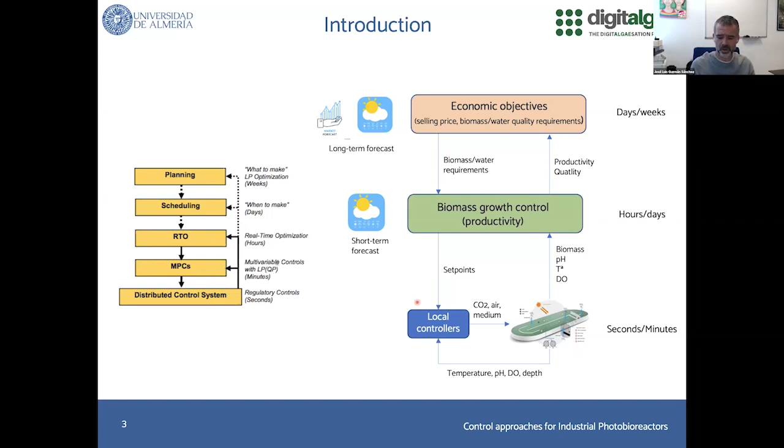Imagine that we have a Formula One car, so we can have a very nice engine and very nice aerodynamics, but if we don't take care of the tires of the car, the performance of the car is not going to be very good. From our point of view, it's the same when we are working with the reactors.

We can propose very nice, very relevant objectives from a high-level point of view, but at the end, if we don't take care of the most important variables, which are directly connected with the microalgae growth rate, we will not reach the final goal that we pursue with the global control architecture.

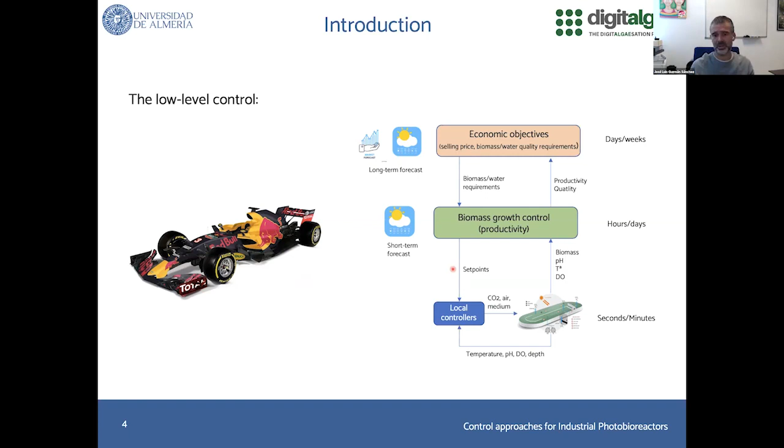For that reason, I will focus mainly on the control of temperature, pH, and dissolved oxygen variables. If we take a look at the microalgae growth rate model, we can see that those variables, as we saw in previous talks, directly affect the microalgae growth rate and then the productivity, such that if we are able to keep these variables close to the optimum values, we will improve the final productivity of the process.

It's not only important when we work with microalgae in clean water. When we work in wastewater treatment, it's interesting to see how these variables also affect the bacteria growth rate. So we can define different kinds of objectives, just trying to optimize the values of temperature, pH, and dissolved oxygen.

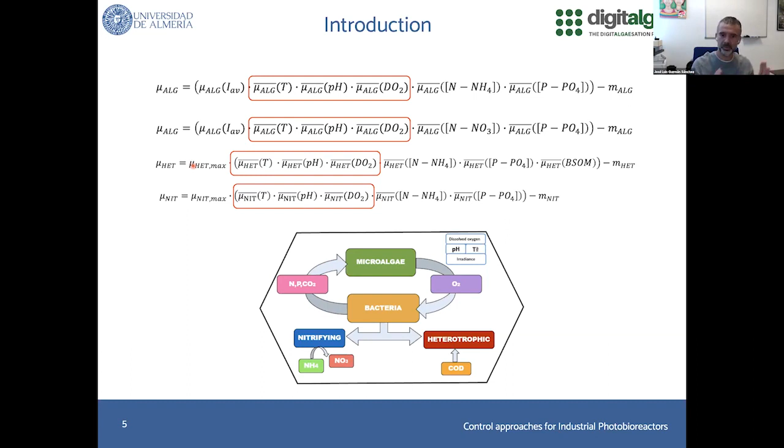All the results I will show you later have been evaluated in different types of reactors that we have here in Almeria, always in outdoor conditions.

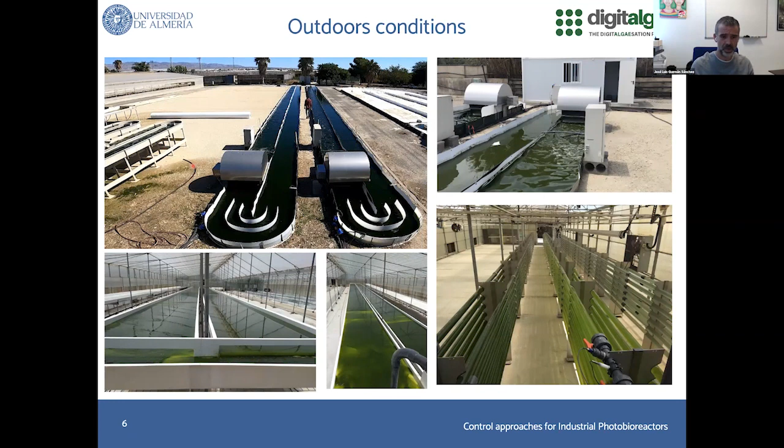Starting with the low-level control of temperature, pH, and dissolved oxygen, which are the variables I will focus on. The idea is that we would like to reach the optimal value for temperature and pH for the strain we have in the reactor at that moment, and also to avoid that the dissolved oxygen is above the critical limit for microalgae growth. Then we will develop different control approaches just to be able to keep these variables close to the optimal values.

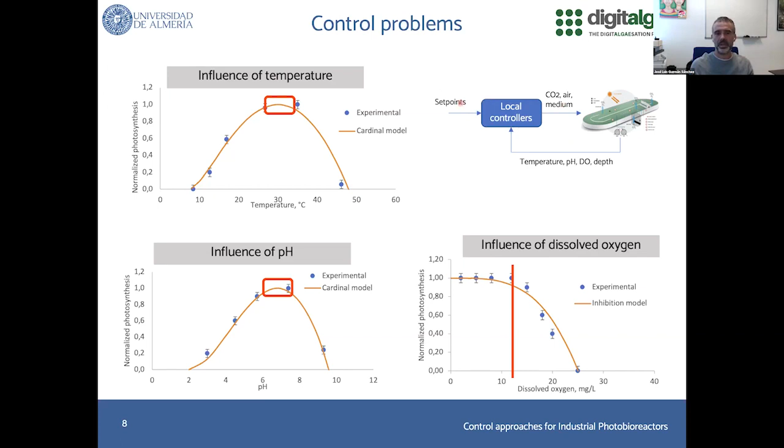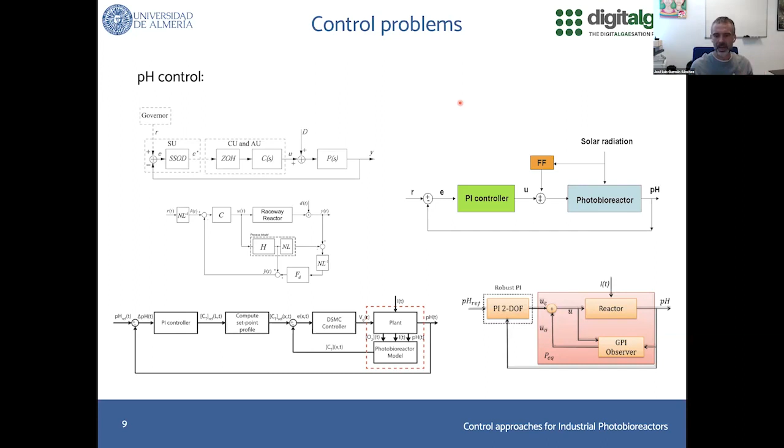So let's start with the pH control. From my point of view, it's a tricky and funny problem at the same time. We have developed many different control approaches to keep the pH around the optimal value, but here I will show you some of them.

If we take a look at the results, classical results of an on-off controller, we can see the behavior of the pH, where when we inject CO2, the pH decreases, and then when we stop injecting, because of the photosynthesis phenomena, the pH increases again.

So we are fighting all the time with the behavior of the pH, which is very interesting from a dynamics point of view, because it strongly depends also on the weather conditions, of course, because of the photosynthesis phenomena.

So we can try to control the pH from different perspectives. I will show you some of them.

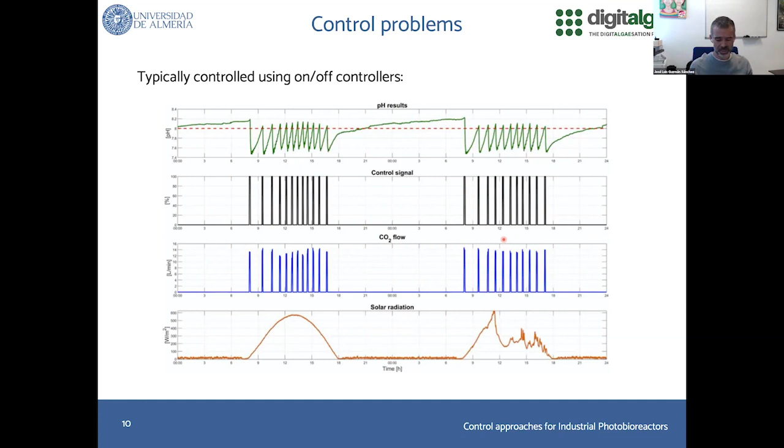One of them is considering the nonlinear dynamics of the pH and its relationship with the inorganic total carbon, such that we can control the pH value through the control of the inorganic total carbon, by trying to keep the equilibrium of the different carbon sources that we have in the medium.

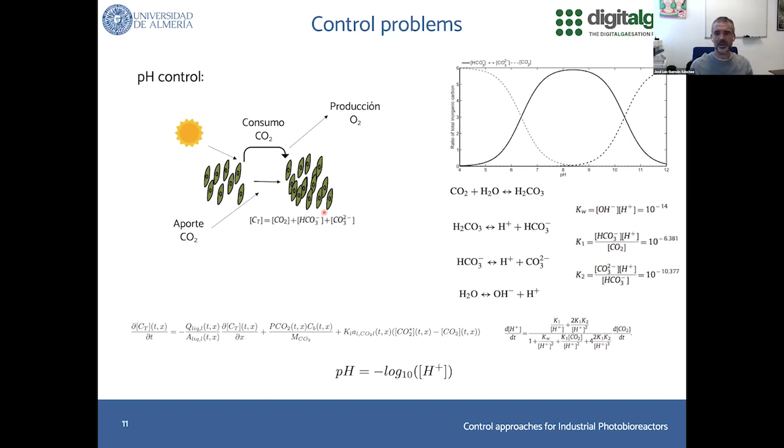Following this idea, we developed a cascade control approach such that we want to control the pH in the medium through a sliding mode controller, which tries to keep the optimal value of the inorganic total carbon that, at the end, is related with the pH value in the system.

We evaluated this approach in the real facilities, and here you can see how we were able to keep the pH value at the optimum set point all the time, thanks to keeping the inorganic total carbon around the set point that was calculated online using this control approach. The results were very good, but the point was that the consumption of CO2 was high.

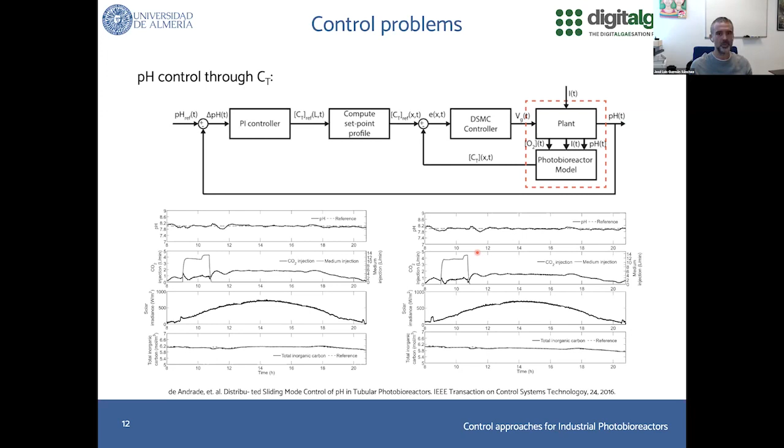So, according to this result, we were thinking about other different solutions, just looking for a trade-off between performance and running cost, how to reach that trade-off. And for that reason, we started to work with event-based control approaches.

We developed an event-based model predictive control algorithm with the following idea. We know, as we saw before, that we have an optimal value for the pH which maximizes the microalgae growth rate. However, if we move just around this value and not just think of the exact value of the pH, we can maximize the productivity, but at the same time, reduce the injections of CO2, and of course, reduce the associated cost.

So the idea is very simple. Once we are in that range around the optimal point, we will not inject CO2, we will not generate events. And when we are out, we inject CO2, and then we provide events to be able to go back to that range.

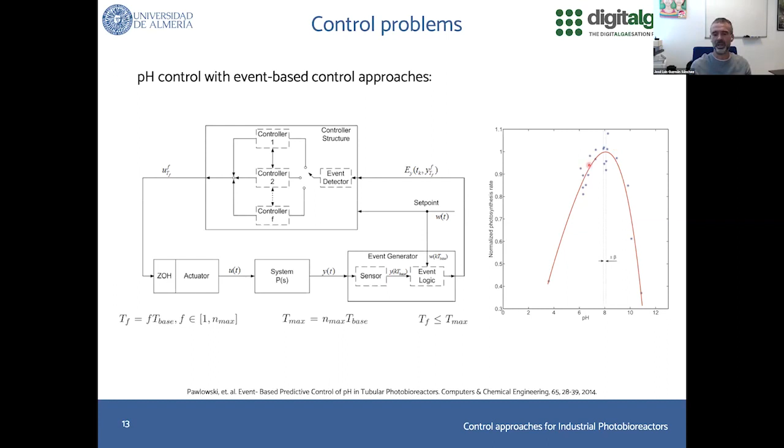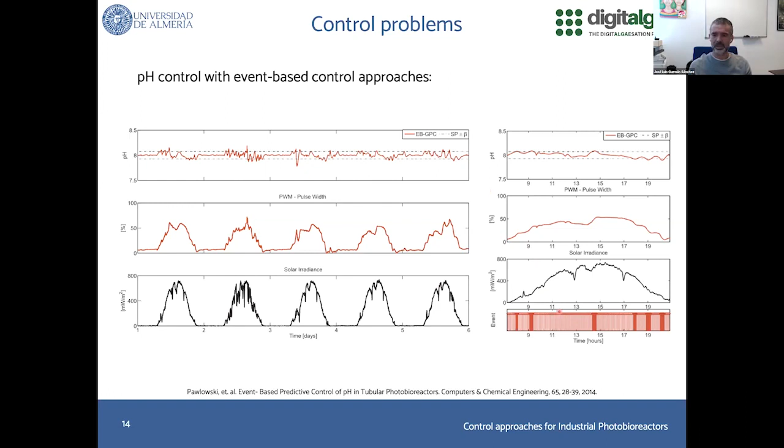So we evaluate the behavior in a raceway reactor, in a tubular reactor, in a closed reactor. Here you can see the results, where now we are not worried about the optimal value, but a range around that optimal value. Because of that, the performance, as you will see in the numerical results, was kept very close to the optimum, but we reduced considerably the injections of CO2.

Here, we made a set of 7-day experiments. Here we compare the solution of just controlling the system with a time-based approach, where we try to reach the optimal value all the time, with the event-based model predictive control approach and the classical on-off control solutions.

We can see the productivity is practically the same in the case of the time-based and the event-based control approaches, but we reduce the injection times every day. So at the end, the reduction of the CO2 injections was over 30%.

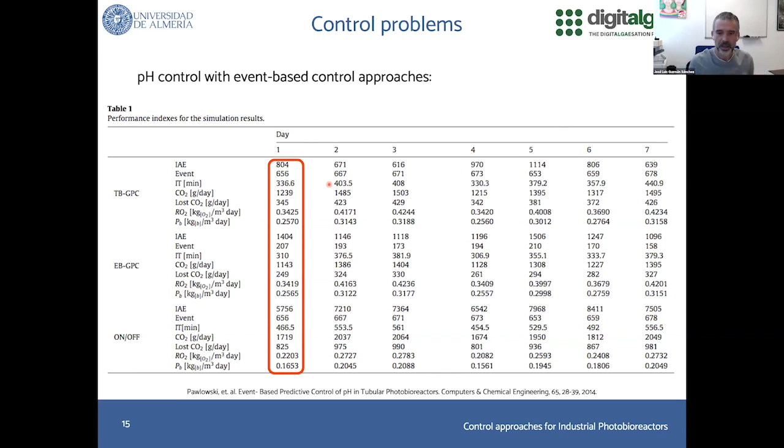So another interesting issue in the control of the pH is that when we usually control the pH, it's during the daytime, because that's when the microalgae are doing the photosynthesis process. But then at the evening, we disconnect the pH control. What happens is that during the night, the pH continues increasing, because in the evening the microalgae continue doing photosynthesis for a while.

And because of the injections of CO2 that we did just before disconnecting the control approach, the pH increases during the night, as you can see in these results and in these other pictures. Because of this, every morning we had to inject a lot of CO2 to decrease the pH value. But also it wasn't good for the microalgae performance, because the pH was changing to high values every evening and every night.

Because of that, we developed different models trying to control the pH also during the night with just a few CO2 injections, in such a way that the objective was to keep the pH value close to the optimal reference every night.

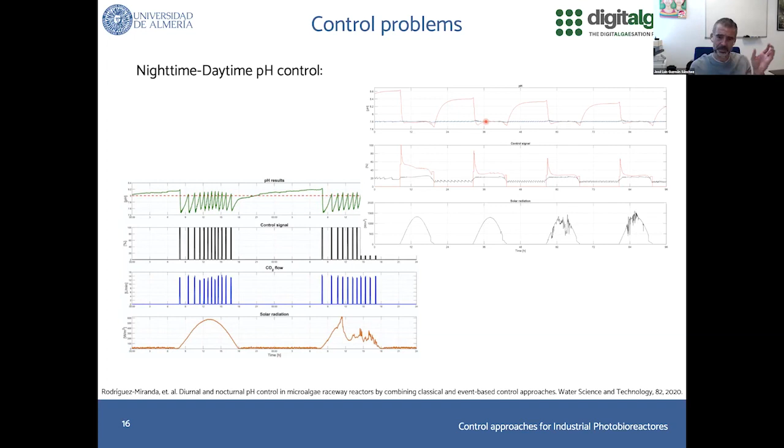So we combined this idea with the event-based control approach that I showed you before, and we obtained these results. As you can see, during the night, we applied just a few CO2 injections to keep the pH close to the optimal value. Because of this, the pH value is not reaching high values anymore, and we are close to the optimal value every morning, as you can see in these results.

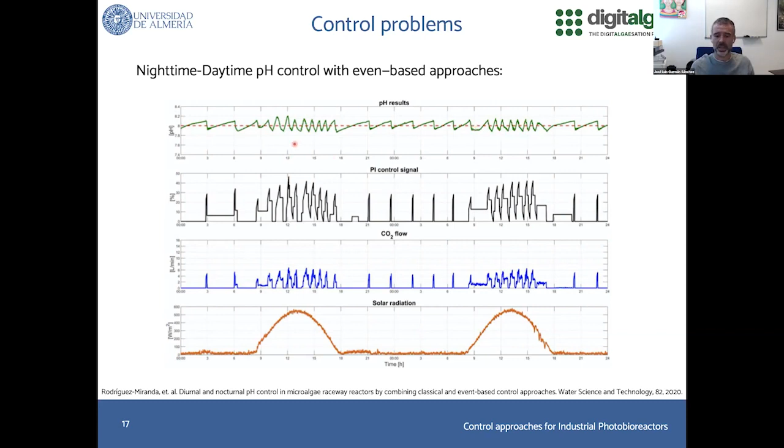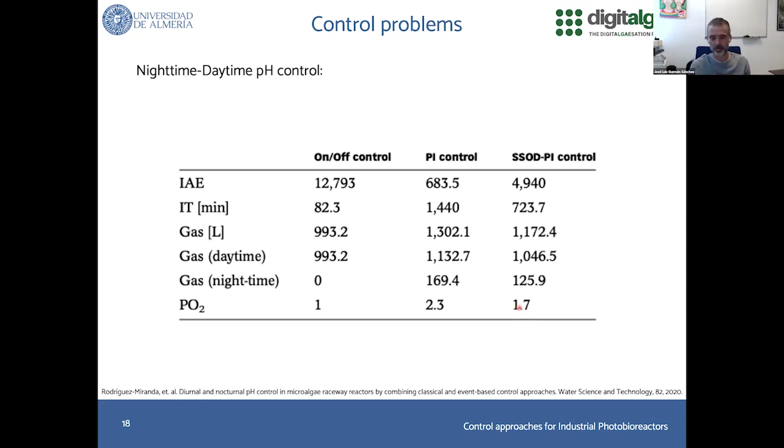So regarding the dissolved oxygen, the idea is just to avoid that the dissolved oxygen goes above the maximum limit. Classically, what is done in the reactors is just to inject a specific air flow in order to decrease the dissolved oxygen in the medium. And sometimes we are just spending so much flow. So what we tried was the following.

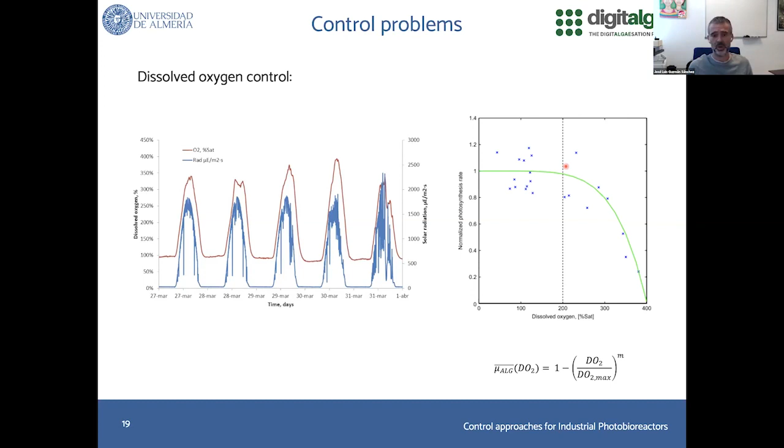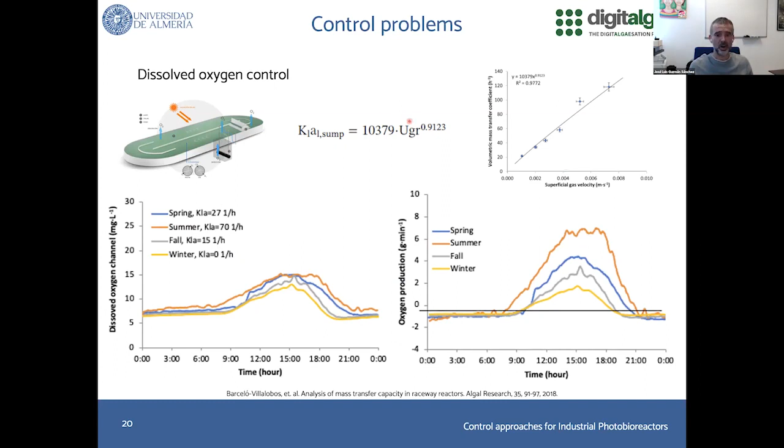We used a model that was developed in our group, which demonstrated that the mass transfer coefficient is not constant along the day, but is variable. It can be related to the air flow. So according to this model, we compare the classical control approach, which is: when the dissolved oxygen is above the limit, we inject a constant airflow to the reactor.

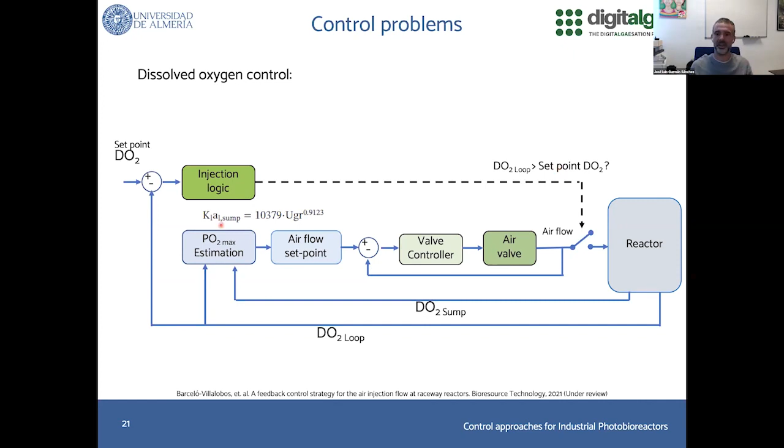Then this solution was evaluated and compared with the following one. The idea was now to estimate the mass transfer coefficient online, and then relate this value with the airflow that is needed in that moment to decrease the dissolved oxygen. So we don't have just a constant airflow anymore, but it's variable along the day according to the mass transfer coefficient changes.

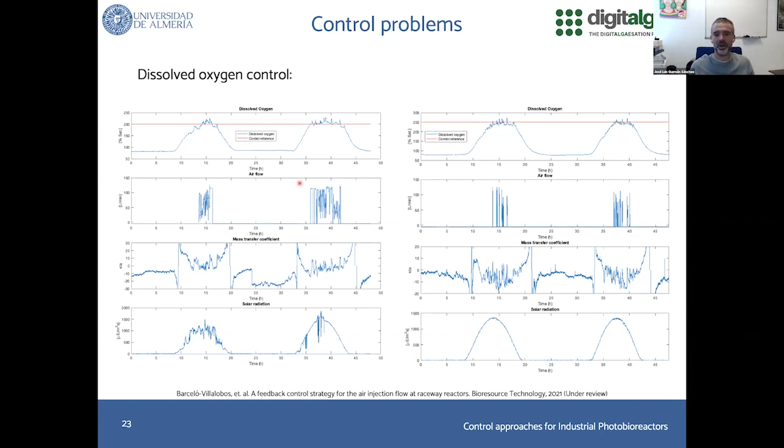So we compared the result with the classical control approach. You can see here a constant mass transfer value and the variable one. We made a simulation comparison first, where we realized that we were able to save more than 20% of airflow injections. This approach was also evaluated in outdoor conditions, and the results were very promising. As you can see here, we were able to stay at the maximum value most of the time without using a constant airflow as the control signal.

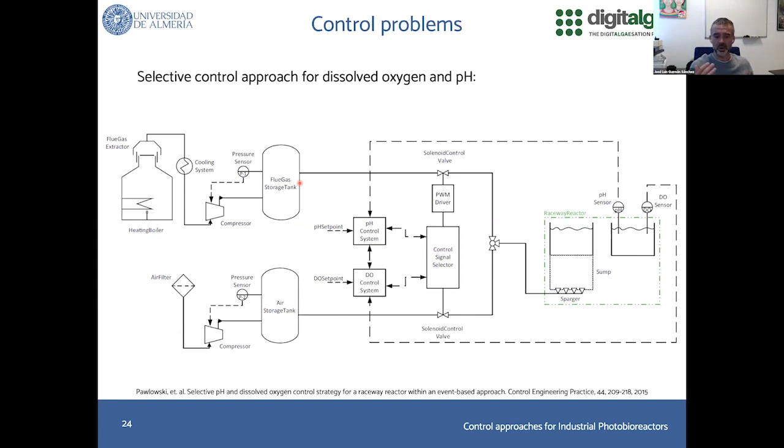Another interesting result was the combination of pH and dissolved oxygen control. Typically injections are not done simultaneously, so we can't inject both gases at once because performance can be considerably reduced. For that reason, we developed a selective control approach, so that once we are injecting CO2, we are not injecting air, and so on. We combined this idea with the events-based control approach shown before. Here you can see the results: we keep the pH in a certain range while keeping the dissolved oxygen below the maximum value. In the control signals, you can observe that the two gases are not injected at the same time in the sample.

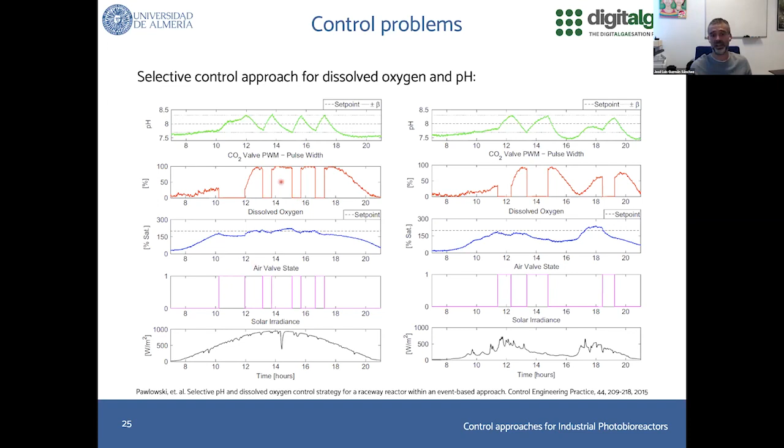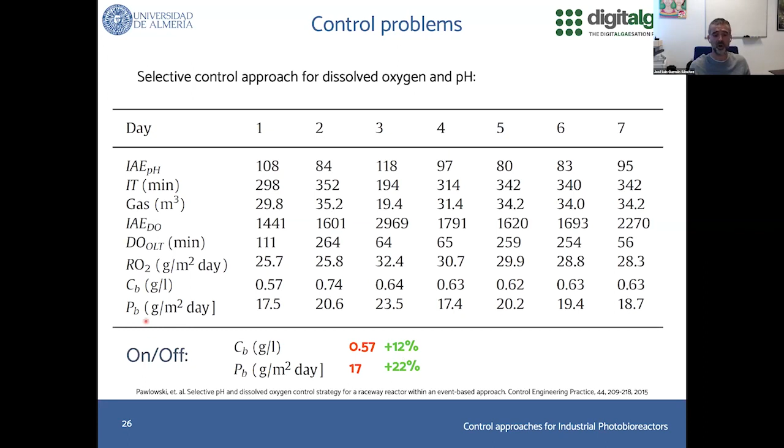Using this approach, which is what we usually use in the reactors all the time, productivity is increased more than 20% compared with a classical on-off solution typically used in industry.

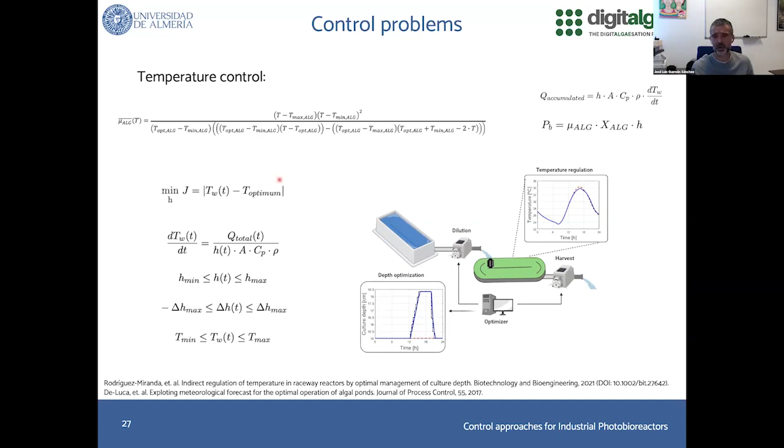Regarding temperature control, we followed an approach very similar to the one presented by Olivier in the work he mentioned before. The idea is to use a thermal model of the reactor, validated for a whole year in Almeria, and develop a model predictive control approach to regulate the culture depth by modifying the harvesting and dilution rates. We use the weather forecast as inputs to the model predictive control and the nonlinear model mentioned before, then determine the culture depth at any moment with a receding horizon approach.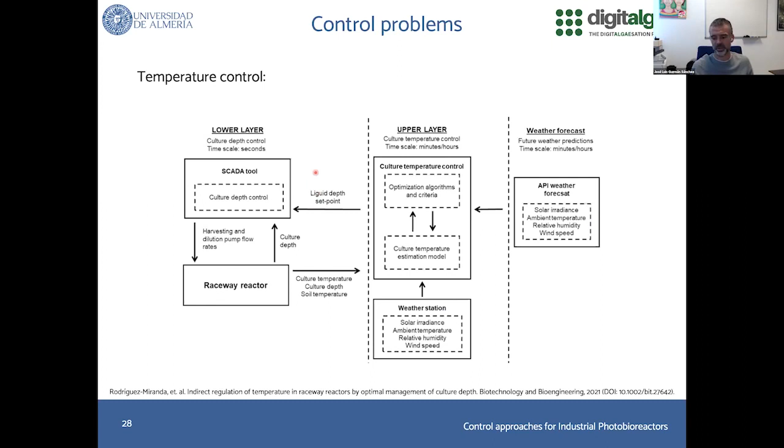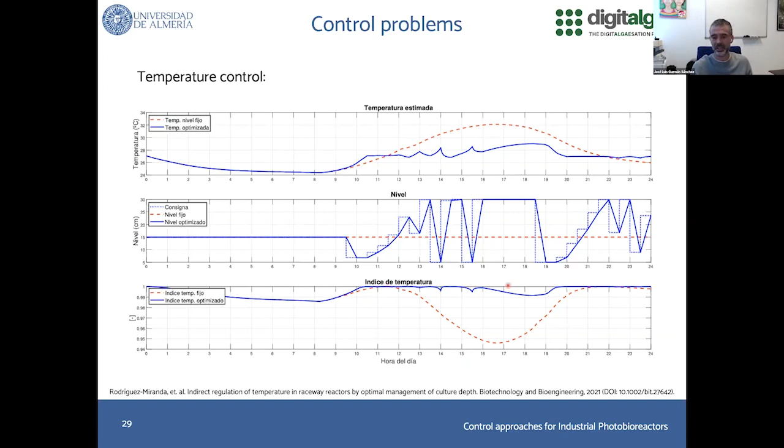Here is a simple comparison for a case where the optimal value is 28 degrees. You can see the solution in red for a fixed culture depth, where the temperature reaches high values. However, with this approach, we modify the culture depth at any moment and keep the temperature very close to the optimal reference. Here is a comparison of the temperature index used in the growth rate model. With this approach, we stay close to 1 most of the time, so we are maximizing that term in the system.

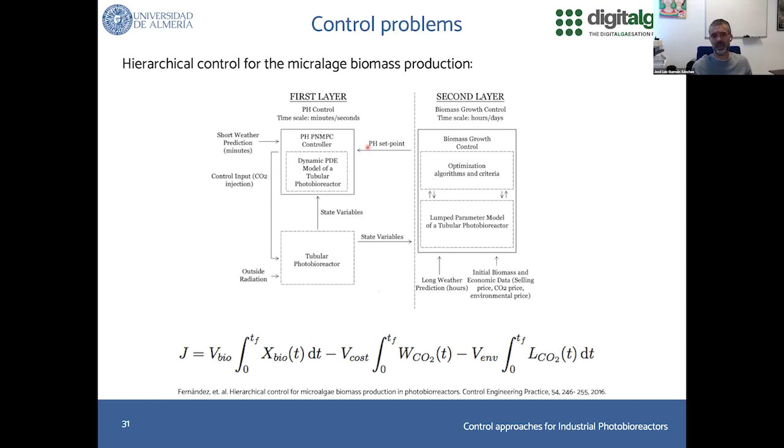Finally, I'd like to show a couple of examples of complete hierarchical control architectures. The first was a solution we proposed for closed tubular reactors. The idea was to propose a hierarchical control architecture to maximize biomass production sales, considering the associated running costs, and optimize the pH value each time to reach this high-level objective. We evaluated the performance over several days, first in simulation, where the optimal pH value is no longer constant but changes within a certain range.

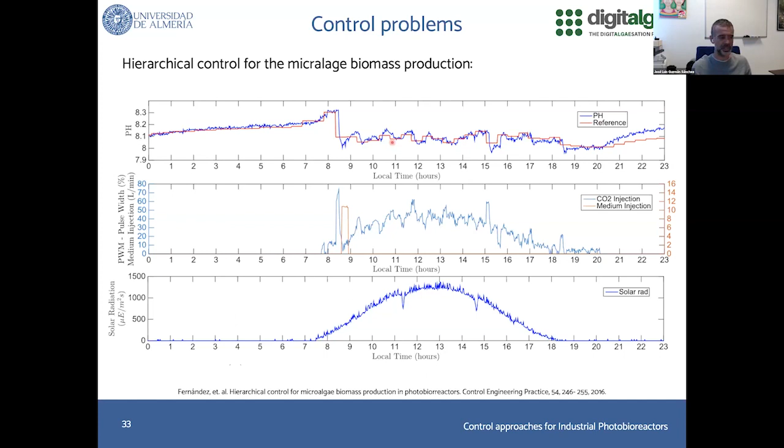The result was very promising in the real facilities, as you can see here. We compared the result with a single-layer solution. In simulation, we kept more or less the same productivity while reducing the cost, but when we evaluated this solution outdoors in the real reactors, productivity was also increased. So we were able not only to increase productivity but also to reduce running costs.

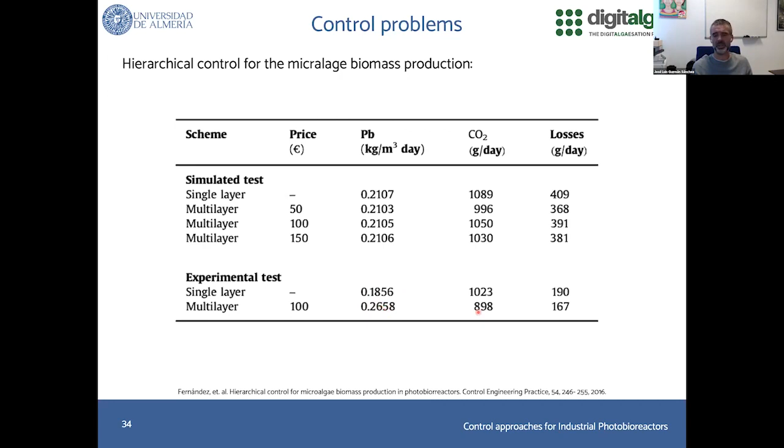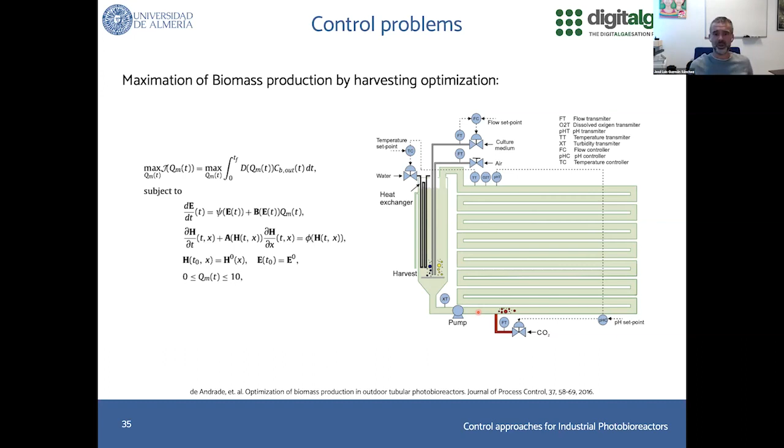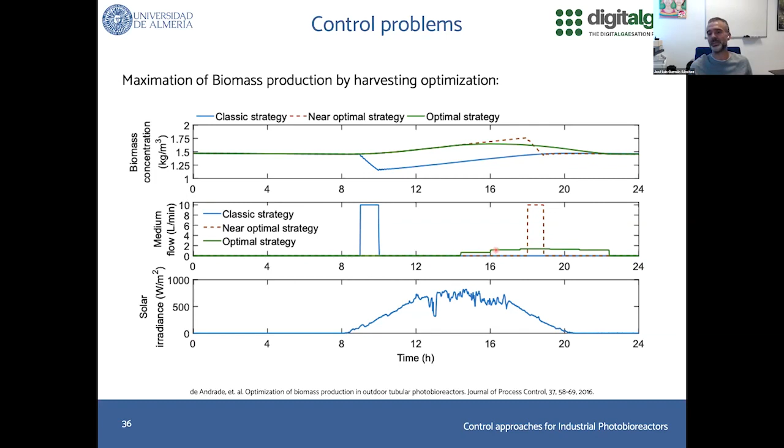As a last example, there was an idea for a nonlinear optimal control approach to optimize harvesting in a tubular reactor. The idea was to change the way harvesting is done, so that instead of using a classical harvesting approach, we try to determine the moment of the day when harvesting is needed. Another approach was to not fix the amount of harvesting at a specific moment, but instead vary and adapt this harvesting along the day.

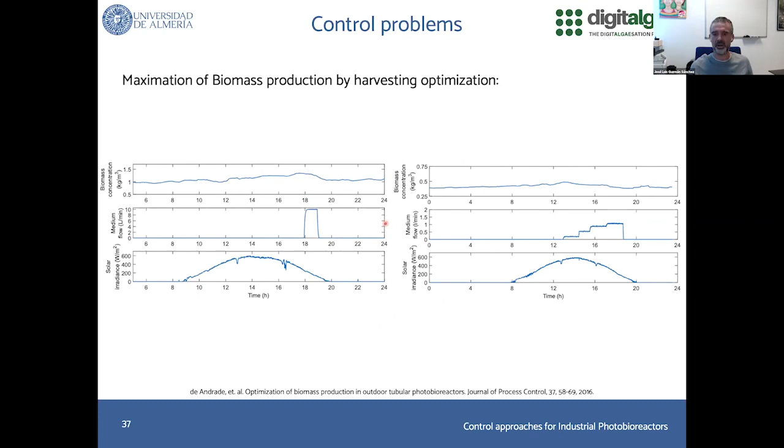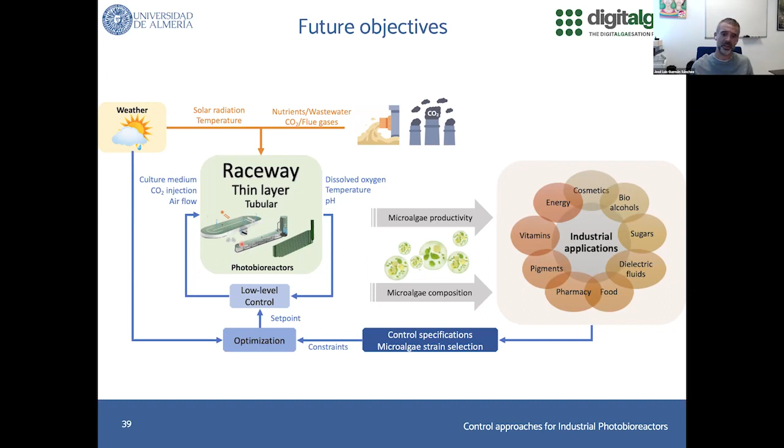We evaluated these two approaches in the real facilities, and they performed very well; with both we were able to increase productivity in the real systems. As a future objective, we are now working on a global aim where the idea is to combine all these experiences in control approaches for photobioreactors, so that we can reach industrial demand. According to that demand, we will determine which type of reactor we need and which control approaches are necessary to fill those demands.

Finally, I have to say that all these results are not only mine, they are the result of a very nice teamwork that we have here in Almeria. And that's all from my side.